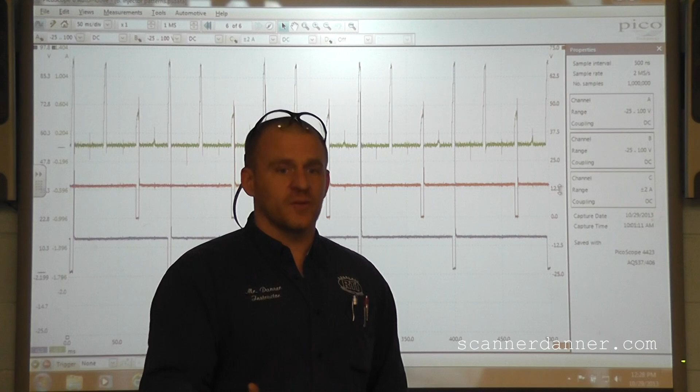Before I show you the inside of the intake, we have the intake off and we're going to check the injector out. I want to cover one thing with you guys that I missed, and make sure we're all clear on what I'm trying to say. What reminded me of this is a video I did with Eric the Car Guy on an S10 pickup that had an injector problem.

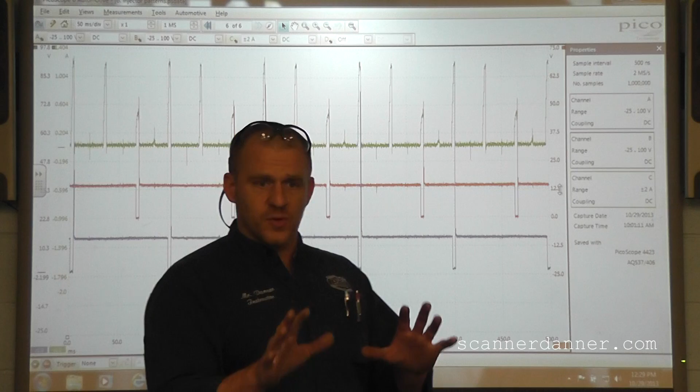We talked about the same kind of scenario where we had a voltage pattern issue, and I mentioned it being on the ground wire, but didn't mention the feed wire. So what I want to cover with you guys is the feed circuit. I think in our last example I mentioned that our problem was going to be with our amperage pattern, either the coil, the wiring, or the driver. You guys remember that, right?

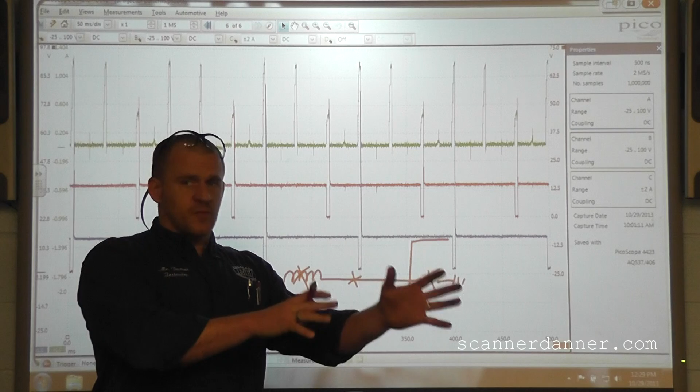I missed something, not in this car. I was correct in what I told you, but depending on the situation, we have a potential to have a feed circuit problem too on this side.

Remember what we're doing, we're measuring the amperage here. And there's a splice that we are before, the splice that goes to the other injectors. So there's 3 injectors that share the feed. We know we have 2 working ones, so we know the feed side is good from here back. No question about it. We wouldn't have a resistance problem on this side because it would affect the other 2.

And I guess that's what I'm trying to tell you guys - depending on the situation, if you were just checking a single injector that didn't have a tie-in, and you had low amperage measured from the feed side, which is where we are, we could have resistance in front of it or after it. This is both on the feed side, resistance in the coil, resistance on the ground, and resistance in the driver. So it really is all of it.

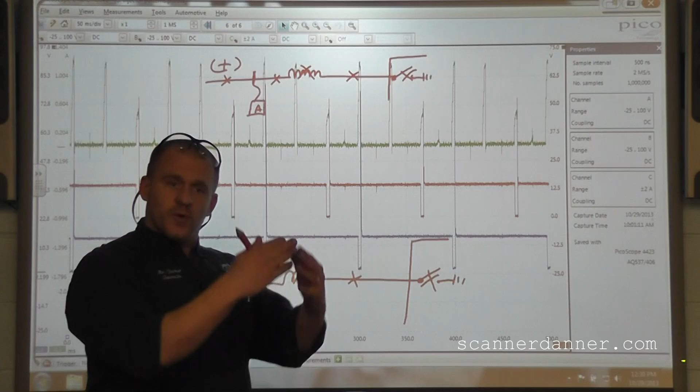Do you guys understand that in our situation, where we're measuring, it cannot be in front of this ammeter where we're measuring? We're measuring at that main connector. Maybe a better picture is we're at a connector here, and we have all the wires that come through, but the main feed comes through the connector. The intake manifold is right here, so we can't get to anything else, and that splice is underneath.

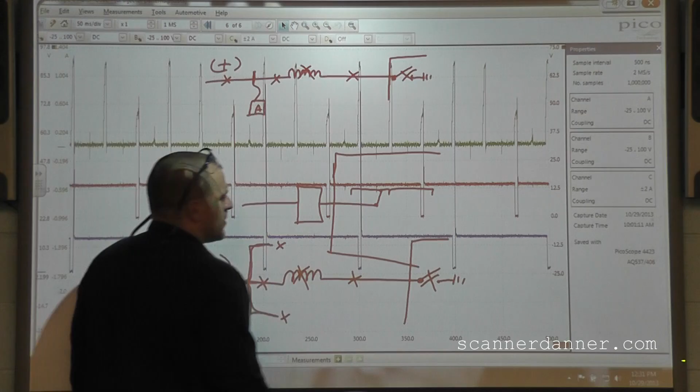So are we correct in saying we have to pull the manifold from where we are? Were we correct in saying that our driver was fine? The answer is yes. But could there be an issue, say, on our number 3 on the feed circuit right here that is not affecting these other 2? In other words, at the splice, could we still have a feed circuit resistance problem? And the answer is yes, we could.

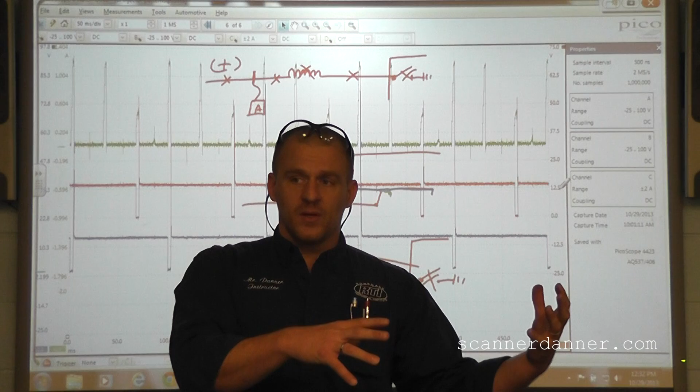So I just wanted to cover that in this situation where we were measuring. Remember what I said - are we confident we need an engine computer, or are we confident enough to pull the intake off? And what I said is we're confident enough to pull the intake off, and we were. This doesn't change that, but I wanted to make sure I'm covering that extra variable on the feed circuit, and why we weren't concerned about it when pulling the manifold - because the other 2 injectors share that same feed. Does that make sense? Okay.

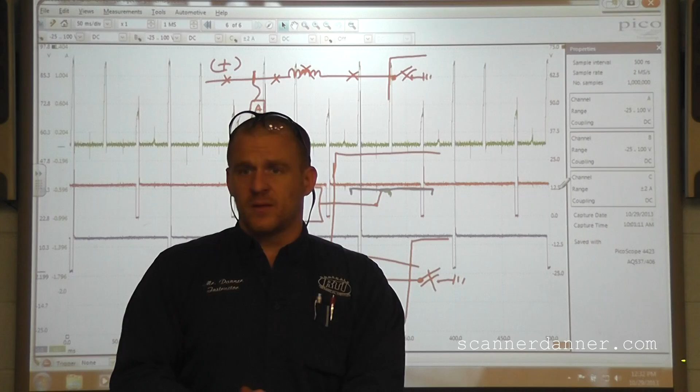There was one other thing I wanted to say. So how would you know, say in this scenario, whether it's the power side, the ground side, or the driver? We addressed the driver, I think we did that part good. The ground side we addressed. How would you know if you had a voltage drop on the supply side?

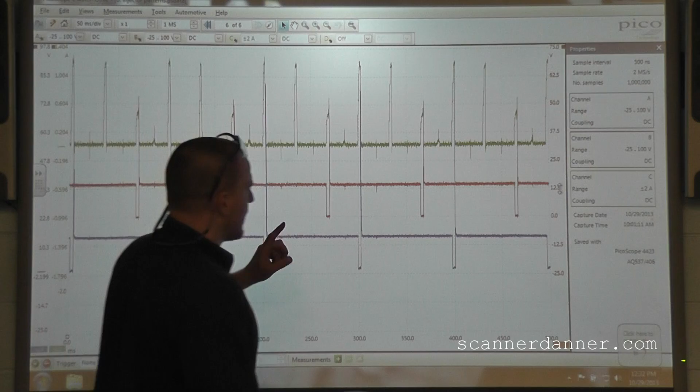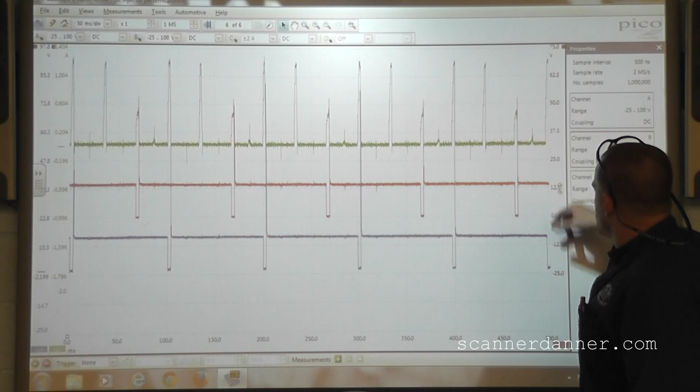Well, let's look at this car real quick. Remember, our number 3 injector is the red trace, and our number 5 is the blue - I think it's the number 5. It's a good injector. Let's look at our supply voltage on this. 14.4 is our supply voltage.

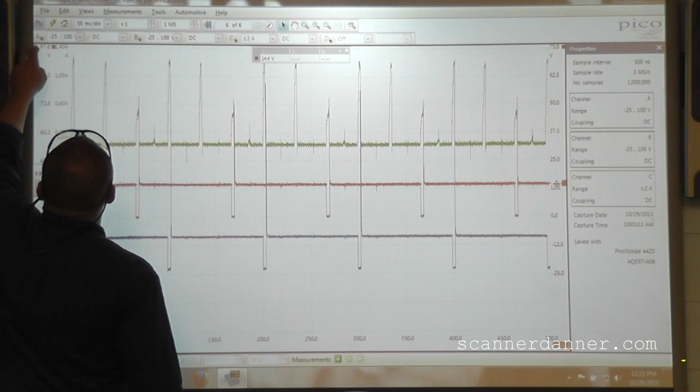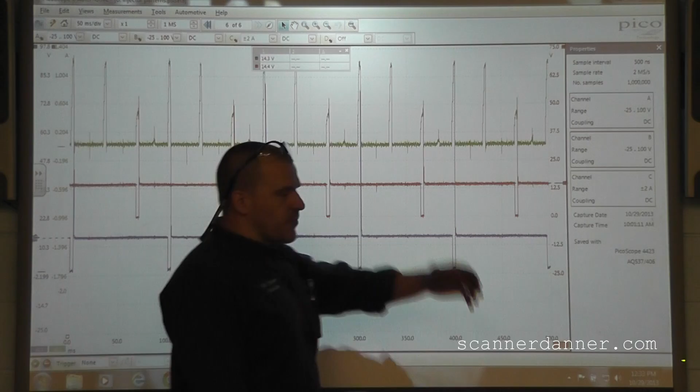I'm on the control wire, on the blue trace - 14.3. Same voltage, right? So does that say that our supply side is good? I see a lot of heads shaking yes. It doesn't. Here's why.

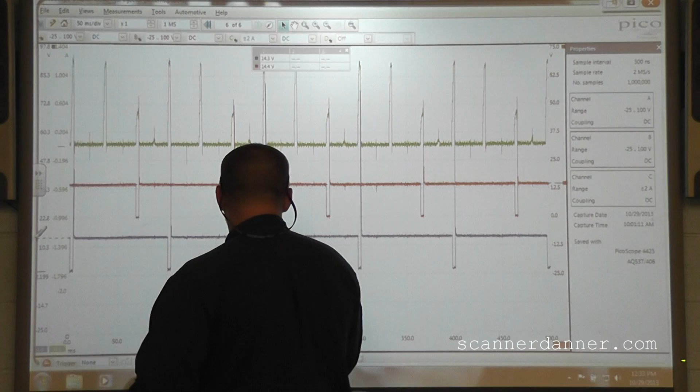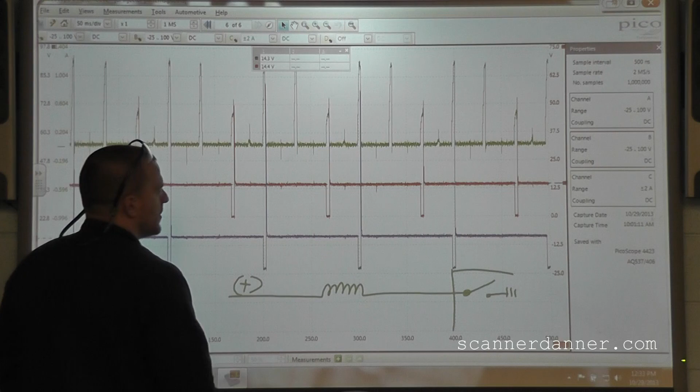When we are looking at this supply voltage, do you guys understand that the injector is off during this section, the circuit is off? With the circuit off, where there's no ground, the driver's off. So if we have 14 volts coming into here, we have 14 volts coming out, the circuit is unloaded.

Could we have a resistance problem still in the feed side that we're not seeing? The answer is yes. On the video that me and Eric did, the feed side was so bad that we had a voltage drop in here. We had, if I remember right, maybe around 7 volts or so with the circuit off.

Now that seems contradictory. It's not. If this feed circuit is so bad, your voltmeter itself, even being a 10 mega ohm impedance meter - now the Pico is 1 mega ohm, so it's less than a regular DMM - could the meter itself that you connect to that circuit cause the voltage drop if that resistance is high enough?

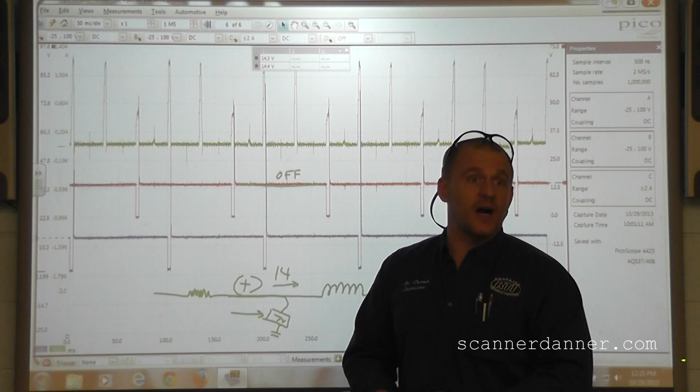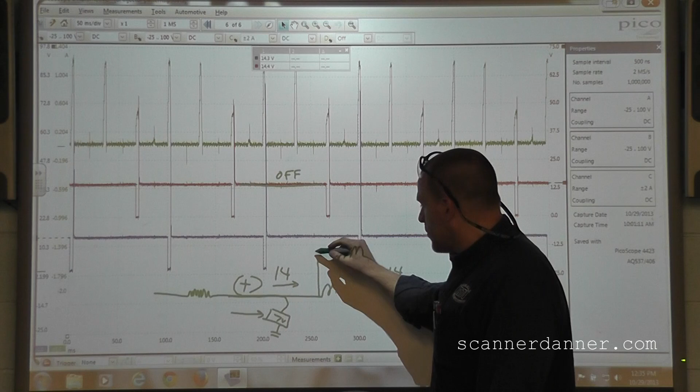And the answer is yes, and that's what can do that. If your resistance is high enough, you will see a drop here with the circuit off, but it's got to be an extremely high amount. If it's a small amount, the only way that you're going to see that would be to check your voltage supply with a voltmeter at the same time that you are monitoring the injector activity.

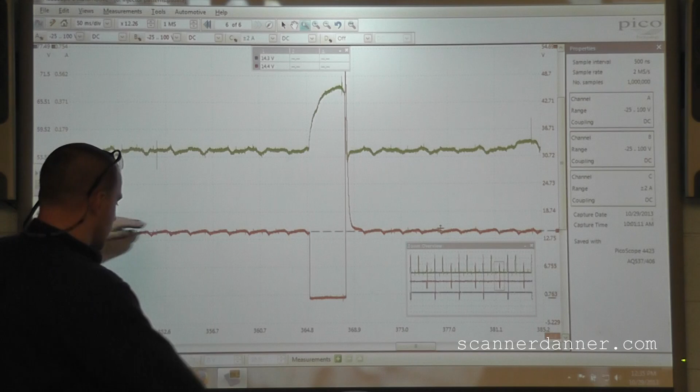And when the injector turns on, what you would do, it would look like this. Take this red trace here, take this line. When is this injector on? The injector is off right here, right? Injector is on down here.

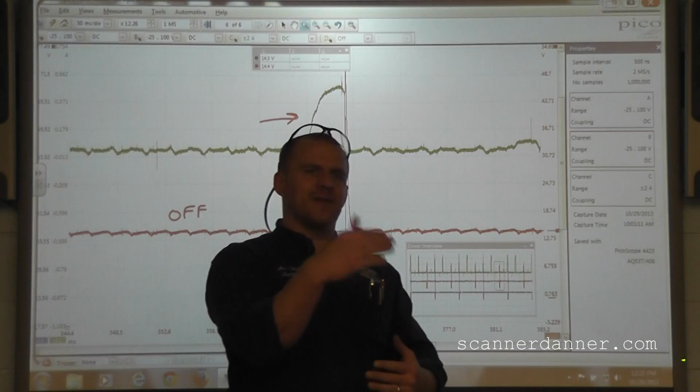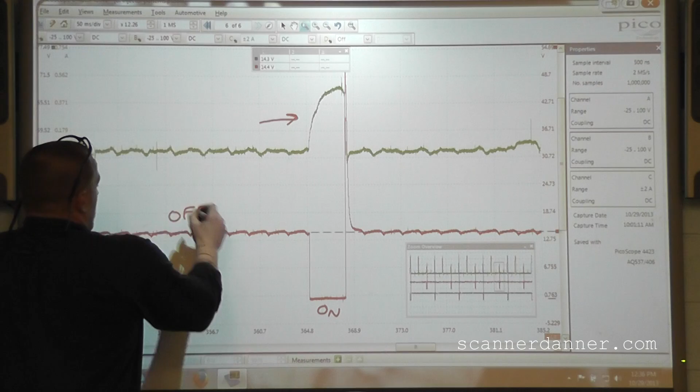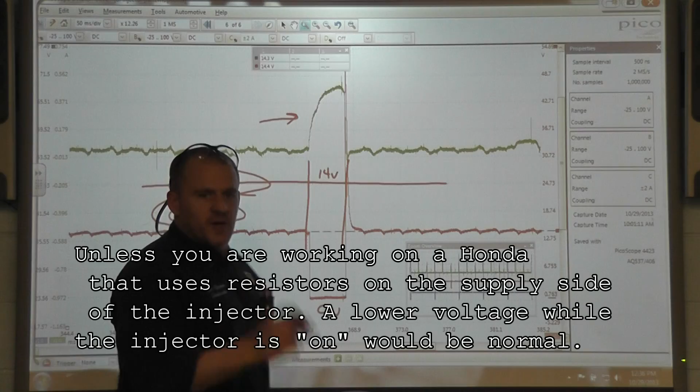When would we want to view that supply side? If we thought our low amperage was from a supply side problem, we would throw in another channel, another measurement, measure your supply side while the injector is on. So that other channel would look like this, and you would want to make sure that you have 14 volts maintained. We don't care about in here with the injector off - we care about when the injector is on and there is current flow. That's what would identify the supply side problem.

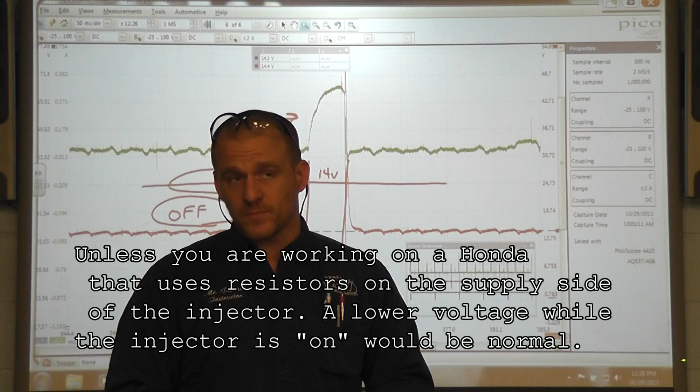There's a lot of variables. I just want to make sure I'm clear in what I'm saying. What we said before was accurate. Intake's got to come off. I don't know where we're going yet. We just pulled the manifold.

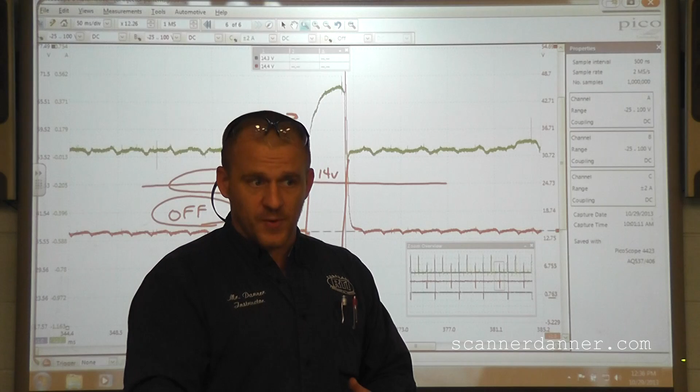I just wanted to cover that in case we find a supply side resistance problem, or if we find a ground side resistance problem - I want to make sure we're covering that. Now maybe it's the injector itself. We're about to find out.

Okay, last thing - I keep saying that. Last thing, well it's not the last thing if I keep going, is it? Another thing, right? Yeah, another thing would be, just to be sure we're clear about these voltage drops and what we're talking about: if there's no current flow on a circuit, there's not going to be a voltage drop. No current flow, no voltage drop. But there's a fine line there.

If that resistance from whatever, corroded wire, whatever, is high enough, when you connect your meter to it, the meter causes the voltage drop. It does take a certain amount to, quote, run a voltmeter. Even a digital voltmeter that's 10 mega ohms, or a scope that's 2 mega ohms, will draw something from that circuit in its measurements - that's what causes the drop. If there was some way that you could look inside the wire without connecting anything to it, as long as there was some connectivity, I don't care if it's a million ohms of resistance, as long as there's some connectivity, there will be 14 volts in that wire.

In our example, 14 volts. As soon as you connect your meter up to it, pulls it right to ground. To us, it might look like zero, say open circuit - there might be some connectivity. Or you might see 3 volts and the circuit's off.

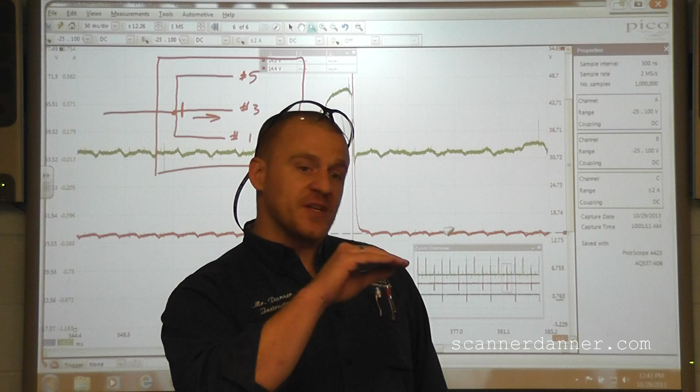That's an extreme case. In our case, a slight voltage drop, say it's 10, 15 ohms maybe, may not be seen with the injector off. And that was the point in putting our voltage up - at the same time, we would look at our negative side voltage. When the injector is on, whether we look at current or negative side control, we put our positive in there, make sure it stays at 14. So just another variable doing voltage measurements, voltage tests.

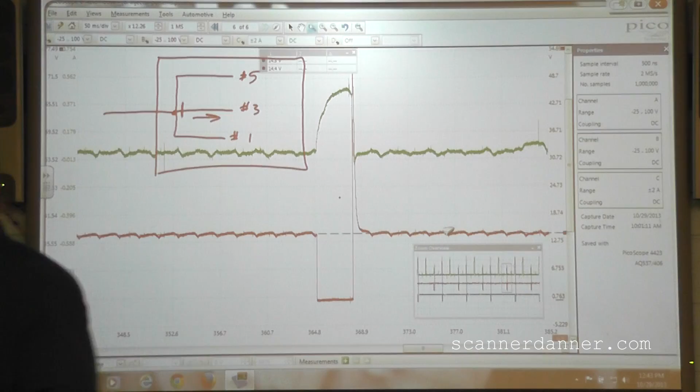Some great questions were asked by my students, which is, we need the circuit loaded to verify this, and our concern here is this middle injector. This is our number 3. Where the splice is, we're concerned about the feed side and the ground, and now that its intake's off, we can't load the circuit anymore. That is correct, we really can't.

But then what I'd mentioned is if we disable the ignition and disable the fuel pump, did we take the grounds off? No, the grounds are attached to the lower part of the intake. We can still crank the engine over and do injector voltage patterns on both the feed and the ground and verify what we're talking about, making sure we have good supply and a good ground.

Now, we already verified our ground as far as from the connector out, but same thing: in this little section of ground wire, we could have resistance. So there's a lot of different ways to do this.

Now, one of the things though, if we crank this engine over, we would definitely want to move these paper towels. I'm laughing because I have had students do that before and not tell me, and bolt everything back together, and we had a car with a 3-cylinder misfire. What it ended up being was paper towels all wrapped around the intake valves, and it took us forever to get them out. So I like having paper towels here to keep stuff from falling in, but we certainly don't want someone going in the car and cranking it right now.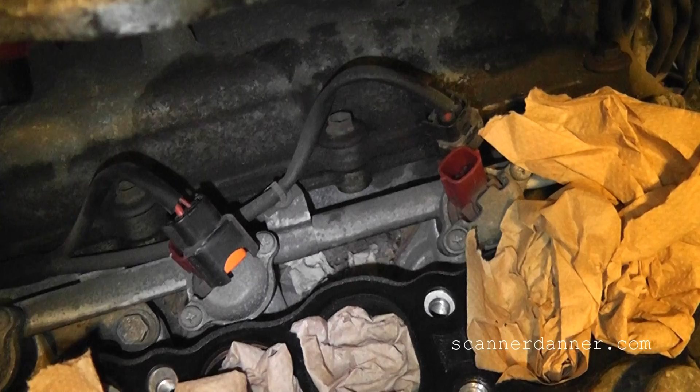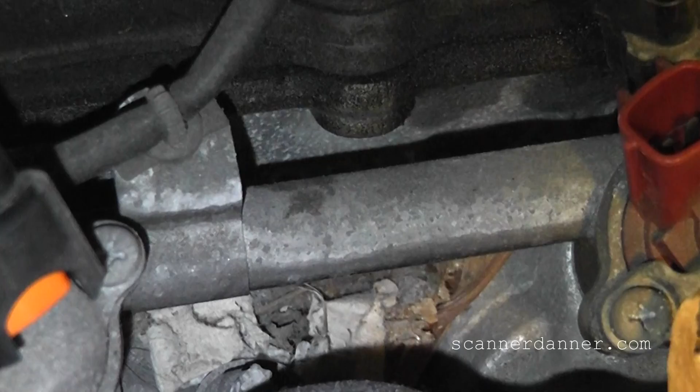Something before I show you the ohm meter, things we look for: if you look underneath the fuel rail there, you see what looks like pieces of paper towel. It's not, it's some other type of material that was there - basically I'm showing you guys a little mouse nest. It wouldn't be a squirrel, I guess, because it's a pretty small area, but this is what we find, wires that are chewed by little critters. I just wanted to point that out. Not that I'm seeing any wiring damage here, but it's kind of neat to see where animals find their homes sometimes, and when you see that, it definitely makes you suspicious of wiring. So just a thought.

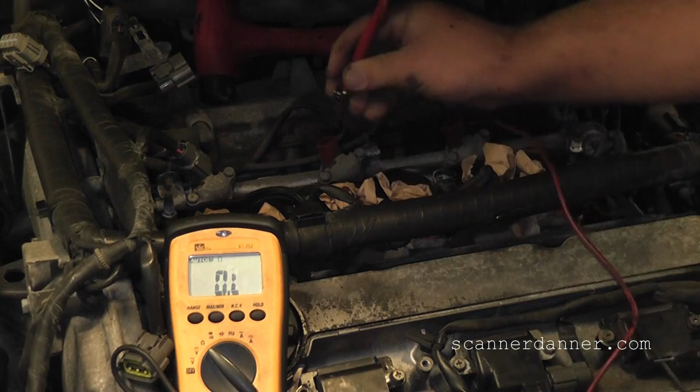Okay, showing the resistance check now, we're going to compare the number 3 in the middle to the number 5, and I'll keep you zoomed out here, then focused on the meter. Got to do the number 3 first. What we're doing is putting one lead to each, making sure our leads do not touch each other.

We're on an auto ranging ohm scale, and what we're reading is 53 ohms of resistance on that middle injector. I think we already know what our problem is. Let's compare that now to the number 5. Typical saturated switch injector is around 12 ohms, 12.5, 12.4 ohms of resistance on that number 5 injector - we're bouncing around there a little bit, sometimes that happens when we don't make good connections. There you go, 12.1 ohms of resistance, and 53 ohms on our number 3. Okay, that's good, Scott, thank you.

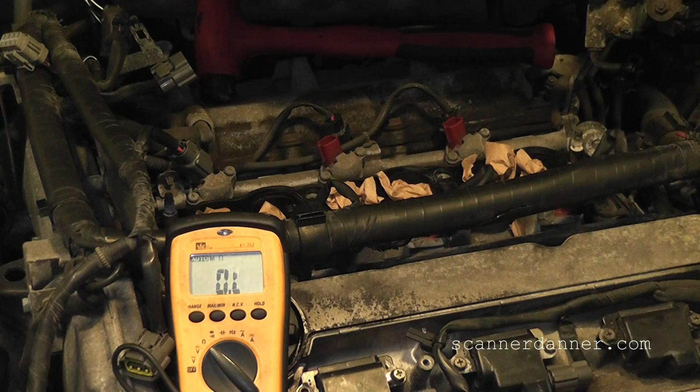53 ohms of resistance on our injector. I don't think there's any reason to go any further. We did have evidence of a little mouse, so we'll do a visual inspection. If you guys felt the need to, you could put a Noid light on here, which is made to check injector circuits, to check that last little section of wiring. But if I do not see any physical damage, I'm not worried about it. It definitely needs a number 3 injector, no question about it. So we'll get an injector, we'll put it in here, see how she goes after that.

Doing an ohm measurement of our new injector just to show you guys. It is 11.4 ohms, and I will show you what this looks like compared to one of the injectors that are already in the car at room temperature. This is the resistance of one of the other injectors that are in the car, at room temperature. We're showing around 13 ohms of resistance. So you can see we have a slight variation between the new injector and the injectors that are in this thing, but we're not going to be too concerned about that.

I think the final captures are going to be how does the car run, is our misfire gone, and then we'll do our low amp probe test on these fuel injectors one more time and see if we can see nice even ramps across the board.

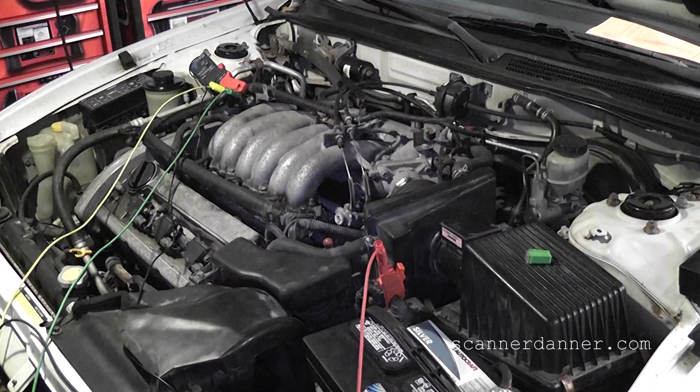So we got the injector back in on this Nissan now. I have it running already. I want you guys to listen to it. Our misfire is definitely gone. I don't know if any of the other shots we were actually able to catch the sound or not. It's actually been about 4 or 5 days waiting on the part, so this is a little bit difficult for me figuring out where we were and what I showed you so far, but I'll let you listen to it.

It's nice and steady, no miss, it revs good, so we definitely fixed our misfire. Let me get you a shot of my connections one more time, and I want to take you back up to the scope screen, show you the after waveforms of the injector, and a couple of variables there that I want to show you too.

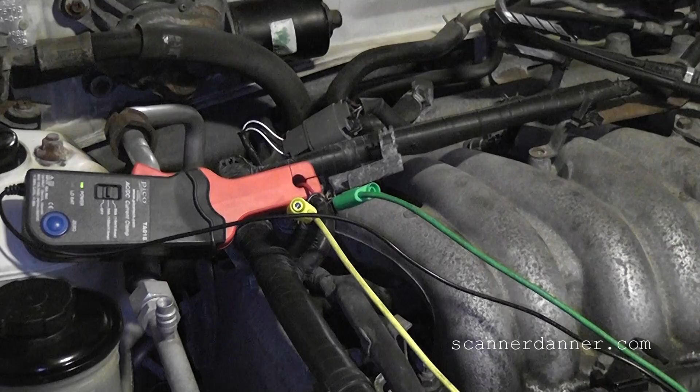So I'm at that same connector we were at before. My amp clamp is on the heavy red wire that feeds all of the back 3 injectors. My yellow trace here is my number 5, one of our known good injectors we were looking at before. My green channel is going to be my number 3 injector. Those wire colors, for anyone who cares, blue-white is number 5, and red-yellow is number 3 on this connector. Number 3 is the injector we replaced, so that's our green channel. Again, amp clamp is going to read all 3, and I'm just looking at 2 injectors here - number 5 as a comparison to what we had before, an older injector, and number 3 being the new injector.

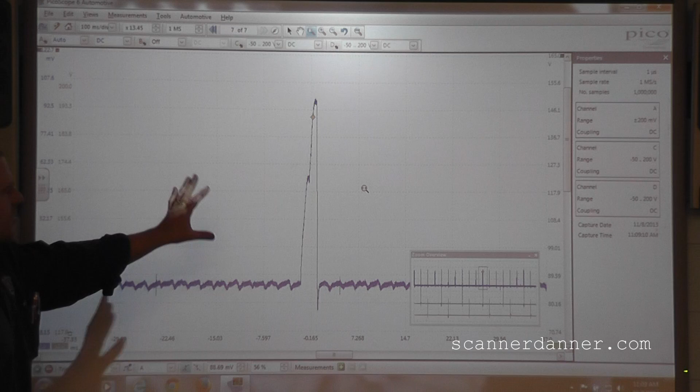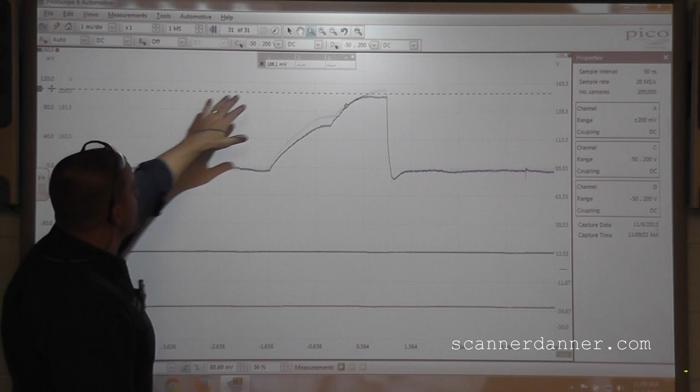We can drop our time base down, we'll see a little more detail, or we can just zoom on that. In this capture right here, this is all 3 injectors. I'm going to do this a little bit differently - drop my time base, go to a lower scale here, focus on this blue trace. We see a couple of characteristics here. One is all 3 injectors are now basically the same amperage, some slight variations. Oh, I'm on voltage, my fault - that says 106 millivolts. On the setting I'm using, that would be 1 amp.

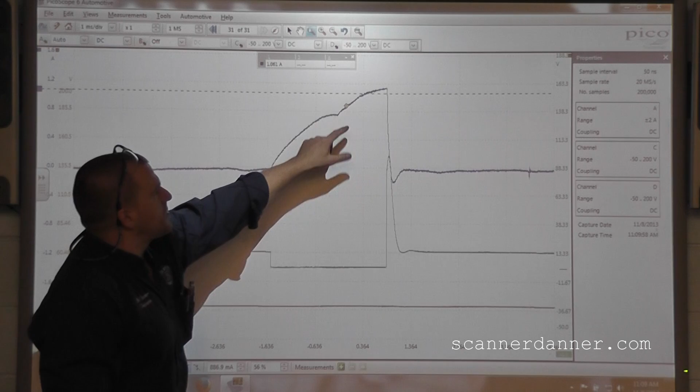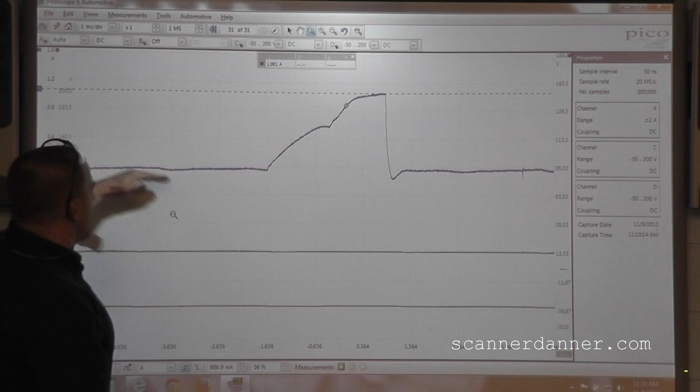Let me change my channel A scales here. I'm using my 60 amp current clamp in the 20 amp mode, and all that did really is change my amperage number there, guys. So that's 1.06 amps where that line is. Some slight variations here, not a big deal - all 3 of those are now firing. If you remember before, our number 3 ramp was very, very low. We do see some different characteristics in the ramp, and I don't like this ripple here - it's one of the first things that I noticed. Let me turn these other channels off for a minute.

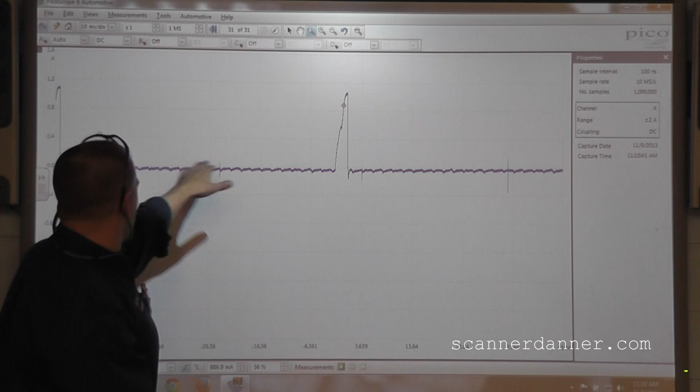So one of the first things we noticed was all these oscillations in here. I'll show you a more zoomed out view. This isn't necessarily a problem with the car, but you see that ripple. Looking for where that's coming from, and by the way, I didn't zero this out very well. I need to re-zero my amp probe.

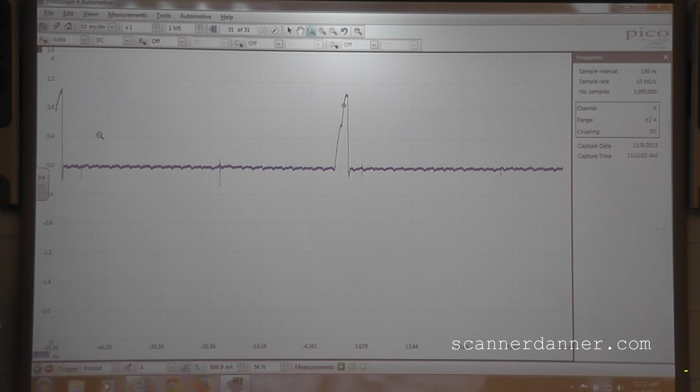Okay, that's a little better. See that oscillation coming and going there too. What I did is I turned on channel B and connected it right to my battery. So channel B is connected right to my battery.

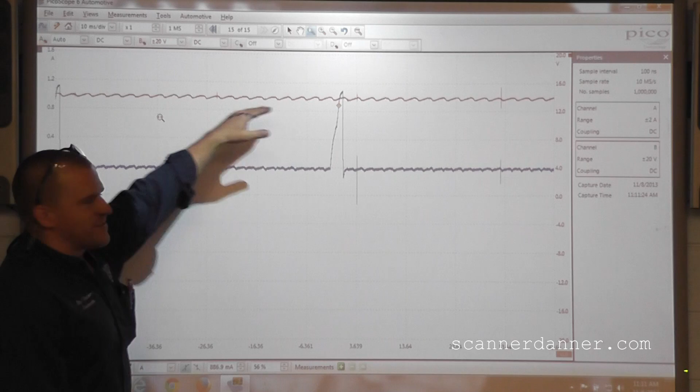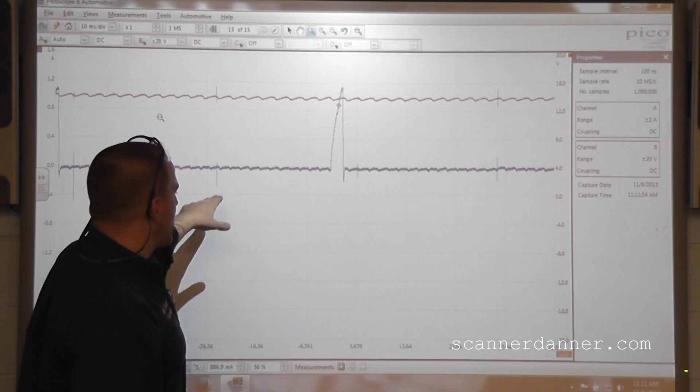Where is this oscillation coming from? Charging system. This is right at the battery. We're going to ignore this for this vehicle. It's not causing a running problem. It is an issue—probably have an alternator that's starting to fail, but that's what this ripple is. Just another variable when it comes to looking at waveforms, and that is affecting our amperage reading here.

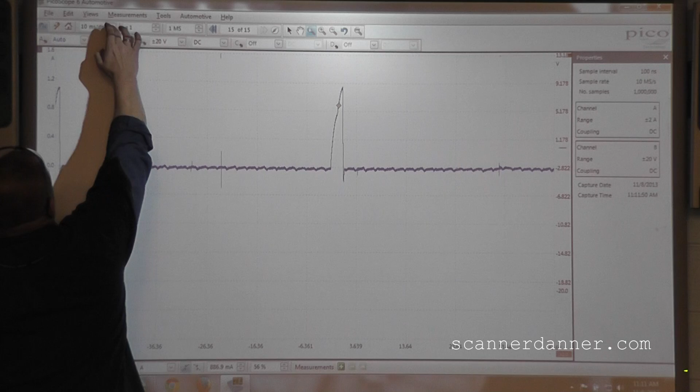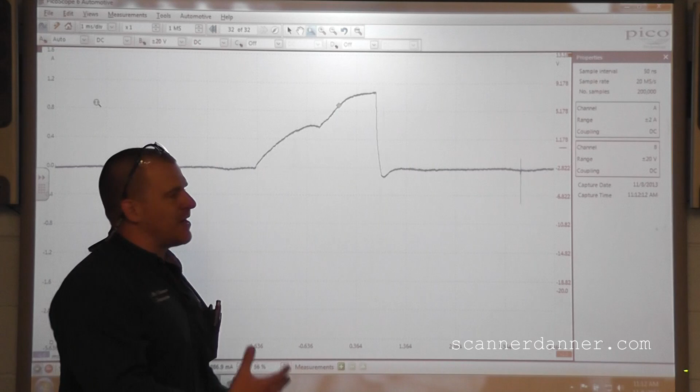So move this up out of the way, focus again on this guy. You understand all these oscillations in here and why it's all wavy looking. Makes it difficult to see this next part, and that is this pintle hump. This pintle hump location in the ramp is actually different from injector to injector, mainly because we changed one. I know there's a lot of material out there that talks about location of the pintle hump, that it should be a certain percentage, but what I'm finding is every injector is different and we really can't compare pintle humps.

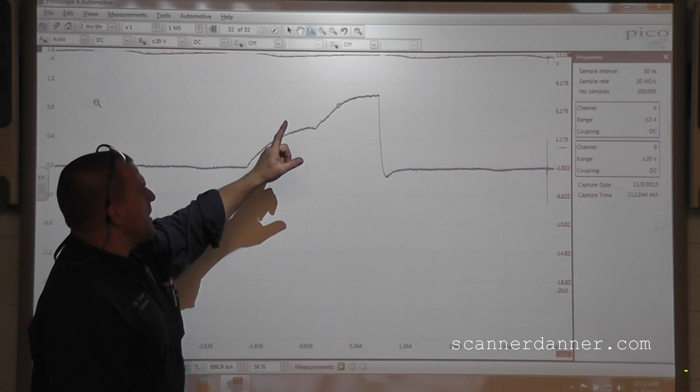The problem with that though is if you didn't know at a later point that this thing had an injector replaced, you might focus too much on that. The reason our pintle hump is in a different location on this vehicle is we have a different injector. So what I can do is show you the individual one here, by pulling in my other channel. Let me turn these other two on.

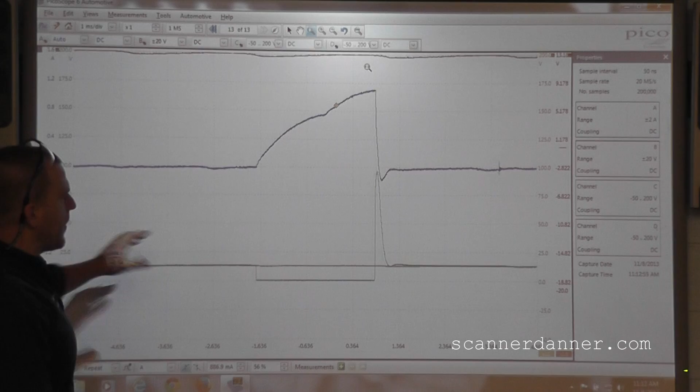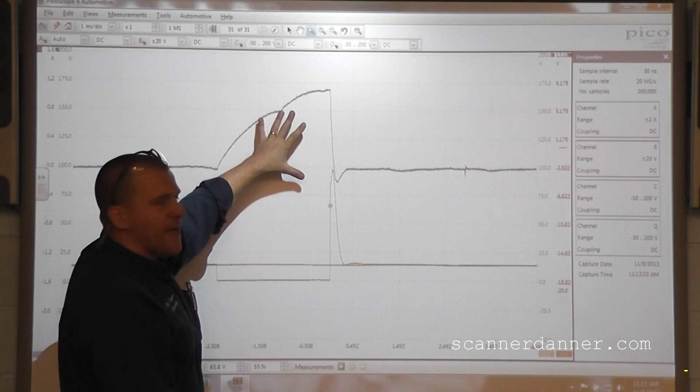Remember, number 3 is on my green trace, number 5 is on my yellow or orange trace. If I want to look at that ramp only, I can trigger off one of these other channels instead of channel A. We'll do the number 3 injector, trigger on channel C, and move my trigger point up into that area. Now we're just looking at the number 3 current waveform instead of all three drawn over top of each other.

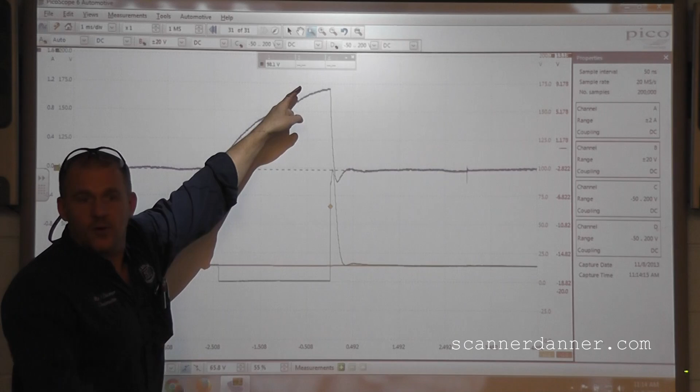Take note of where that pintle hump is in relation to where it turns on—beyond halfway. So this is number 3 current, number 3 voltage. Let's take a look at the spike too while we're here. This voltage spike on number 3 is actually hitting about 100 volts, and that's really why we wanted to use an attenuator. I think if I remember, the old injector was around 82 volts or so when we were looking at the voltage waveform.

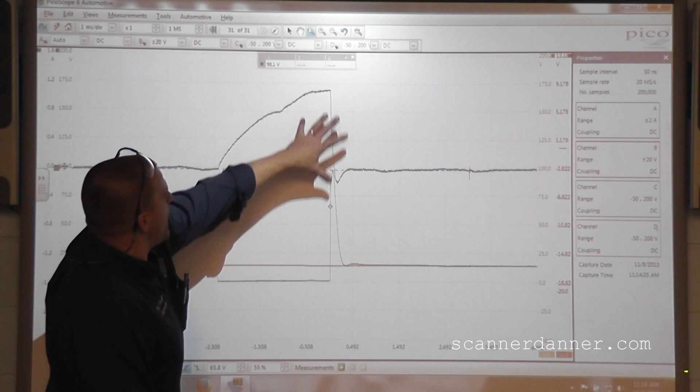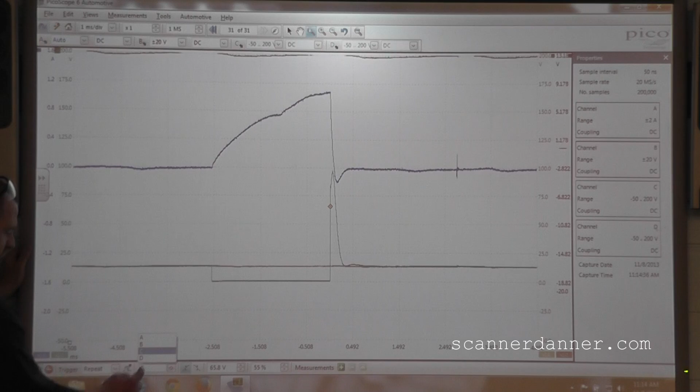So let's focus now on our number 5 injector, which is our 4th channel. I'm going to trigger off channel D. There's my injector voltage waveform. You see the pintle hump—it kind of changed characteristic on us a little bit, didn't it?

Let's bounce back and forth. This is number 5 current, number 5 voltage. Number 3 current, number 3 voltage. We see different characteristics in this—the hump is more pronounced. In fact, our voltage spike is different. Look at the height of this voltage spike on the number 5.

This is the one that we did not replace—it's 82 volts. Trigger off C, and this one is 99 volts. Now that kind of matches our resistance measurement we did earlier too.

We had, I think, 13 ohms of resistance on the factory injectors that were in there, and on this one we had about 11.9 or maybe 11.8 ohms of resistance. So a little bit more bang maybe, with the magnetic field, a little bit more current. I don't know the current peak of that—let's get a measurement there.

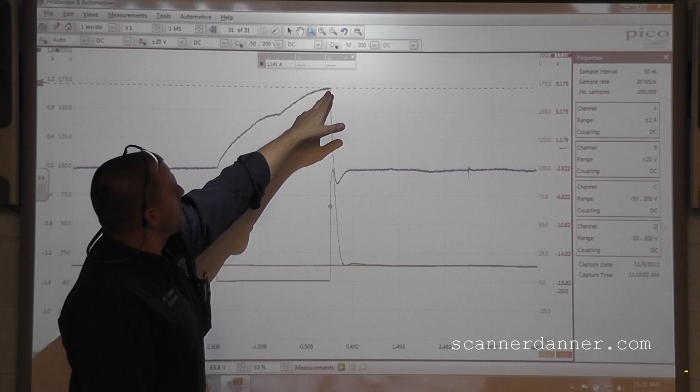Kind of touching that 1.14 amp line there with that one. And yeah, it matches. Our resistance is lower on this new injector, our current is a little bit higher, and our magnetic field collapse spike is higher.

Here's the point: it's just a variable changing when using an aftermarket part. I think it's important to point this out because if you get this vehicle in at a later point in time, let's say with a misfire, are you going to focus on the fact that one of your six injector pintle humps looks different? Are you going to focus on one of your injector magnetic field collapse spikes looking different? I mean, that's what we do. So it's a variable here, something to think about.

This is not causing a problem. The car's running fine, we fixed it. But look at the waveform characteristics - it's a little bit different. So I wanted to show you guys that.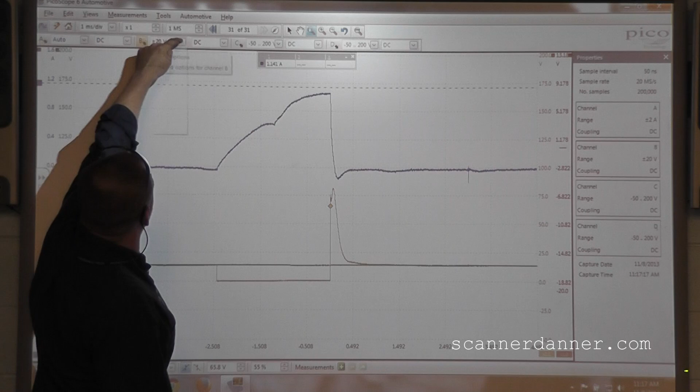One more time, I'll show you that ripple that's going on. Channel B, turn this guy back on. He is on, just going to pull him down in here, and we'll look at a little bit more time there.

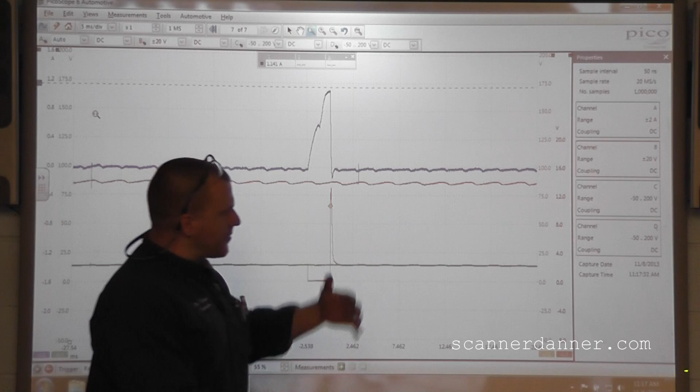You see this red oscillation from the battery - this is battery voltage - exactly corresponding with this blue trace. And so the noise, we can call it noise if you want to, in our injector pattern is caused by something going on with this alternator. Now that's going to need to be corrected.

It's not causing a drivability problem in this car. We have seen them where they do. In fact, I'll throw a hyperlink in here for a vehicle with a bad diode in an alternator where we had a speedometer that was going nuts and some crazy stuff like that. I'll throw the link in for that. So we really see the same ripple in our voltage waveform here too.

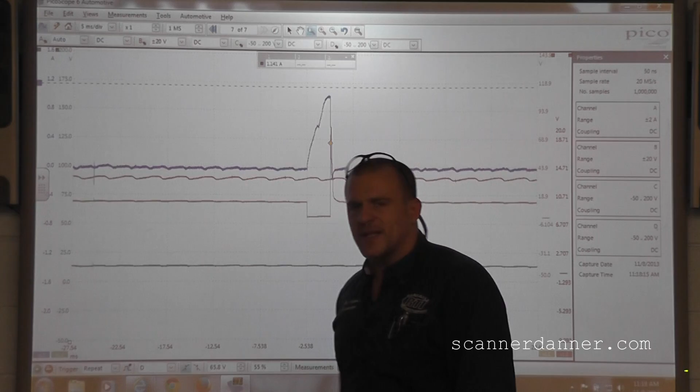So that's it - faulty injector on this Nissan. Maybe one more thing I'll show you is our coil current ramps again, because that's another variable. We talked about that before, but we're talking about variables and waveforms. Let's show you one more time.

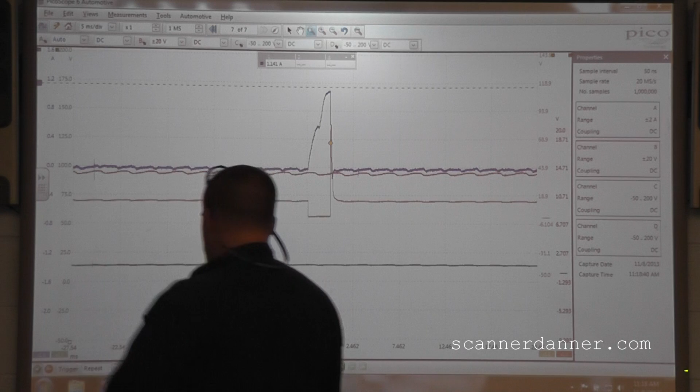I'm going to move my amp probe to that ground wire that all the coils share, get a reading on that. First thing we want to do when acquiring a new signal is we really want no trigger - never have a trigger set up when you're acquiring a new signal.

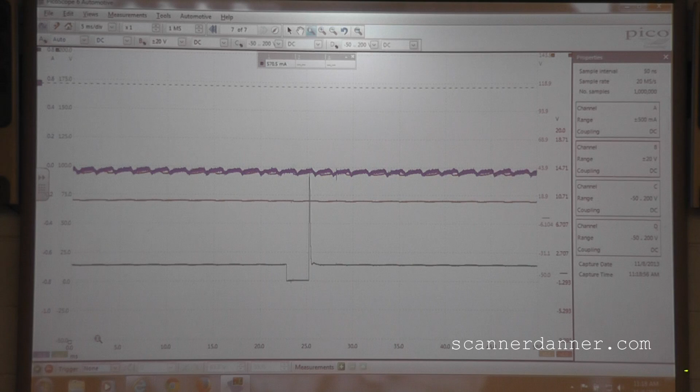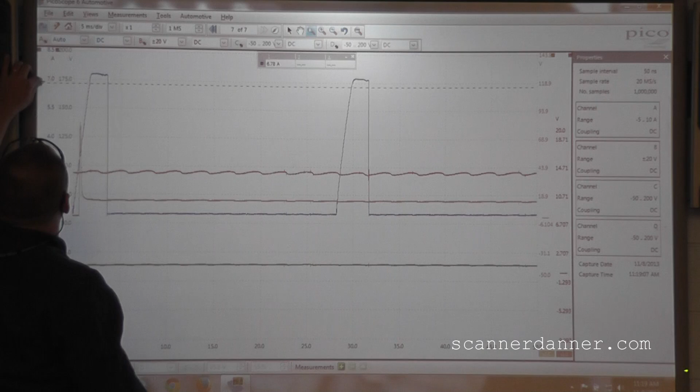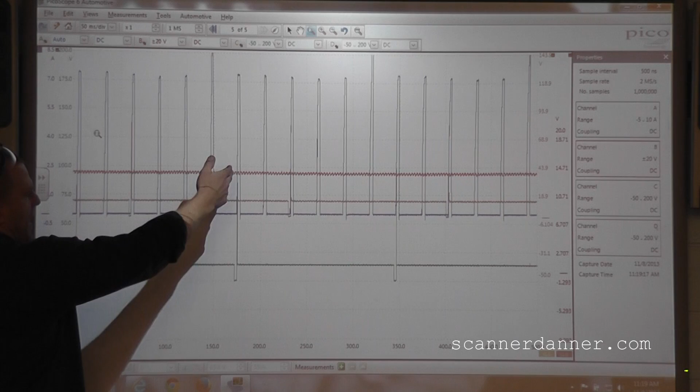And we really don't need these other channels. Our coil current is what we're looking at, this blue trace. Increase our time base - these other channels, battery and my injectors, really aren't needed at this point, so we'll just turn those off. That battery ripple, I don't know, we can leave that there, it's not a big deal.

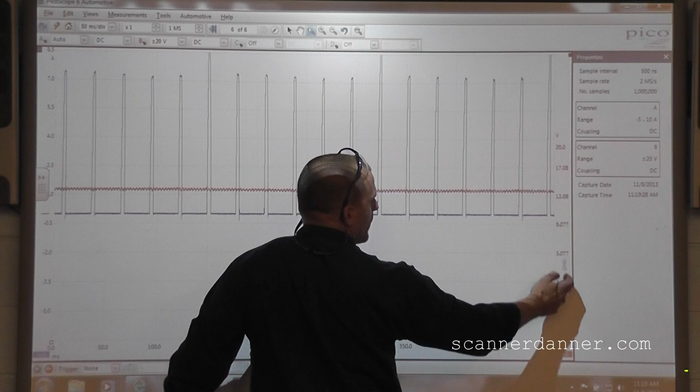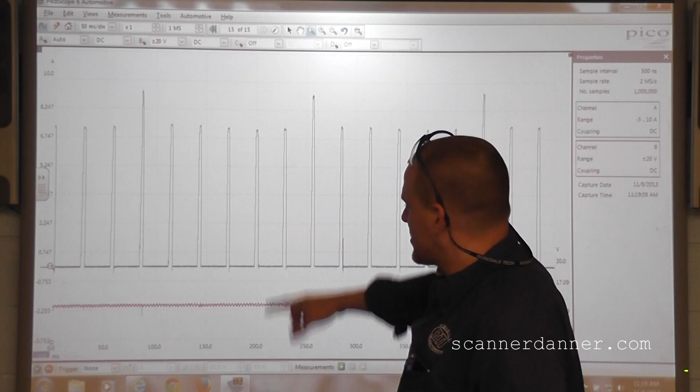Here's your coil current patterns, and again, we see that coil number 3. Why does it look like that? It looks like that because it was replaced. Trigger off A.

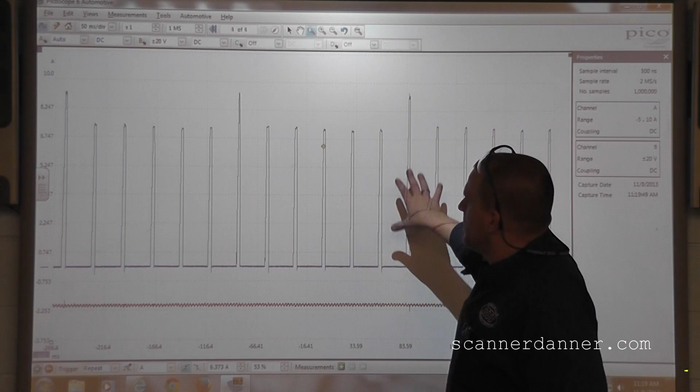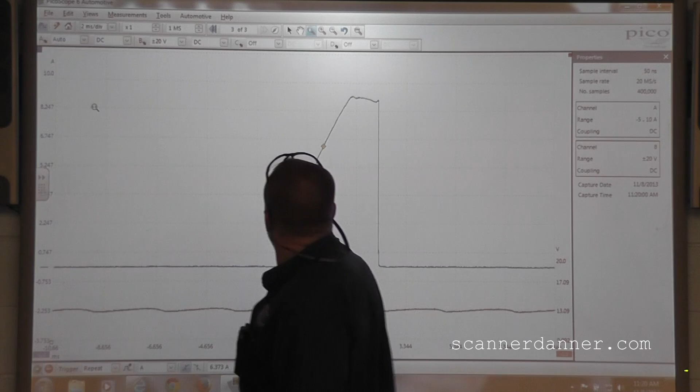Get some detail there - this is repetition. We know that's the number 3 from before, we see it repeating each time. And if I go in on this, this is all of the coils being drawn over top of each other. And you know, we see different characteristics with that number 3.

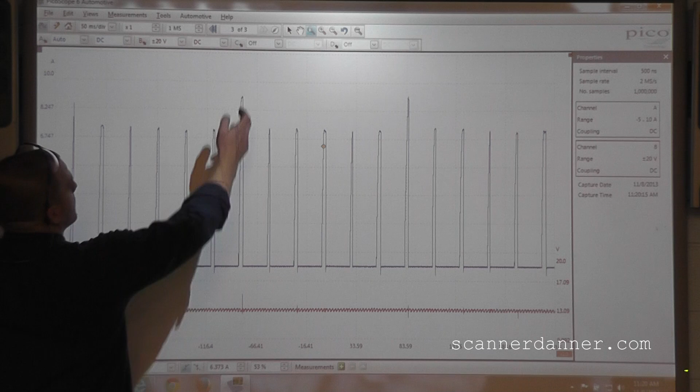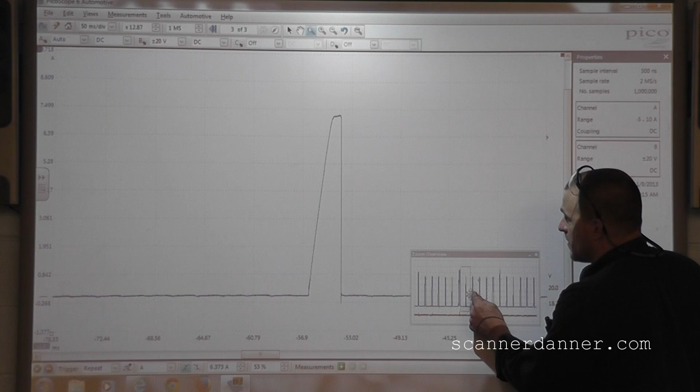Zoom back out one more time and show you - freeze the picture, and that would be this one right here. That characteristic on that number 3 looks a lot different than the coil next to it. The height is different. Why? It's different not because the computer's controlling it any different, but because that is a different coil. It is an aftermarket coil.

And again, this vehicle would come in, and you saw this - you have a number 3 cylinder misfire. Now think about this: number 3 cylinder misfire, let's say down the road it comes back with a number 3. We have a coil on the number 3 that looks different. We have an injector on the number 3 that looks different than the rest of the car. Tell me that wouldn't throw you for a loop.

You know, imagine the car comes in with maybe an intake valve problem or something on that number 3. You're going to be possibly changing an injector and changing a coil to no avail because the waveform characteristics look different. So maybe a final word here on this video would be: aftermarket parts can affect the waveform. But that's a fix - number 3 injector was our main issue with this vehicle.

I think I'm happy where this is at now.